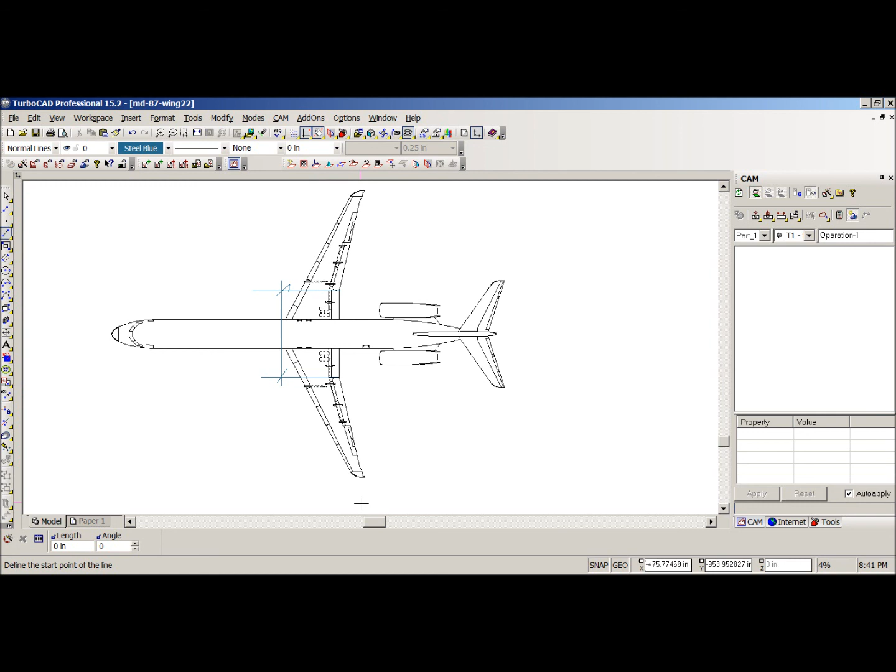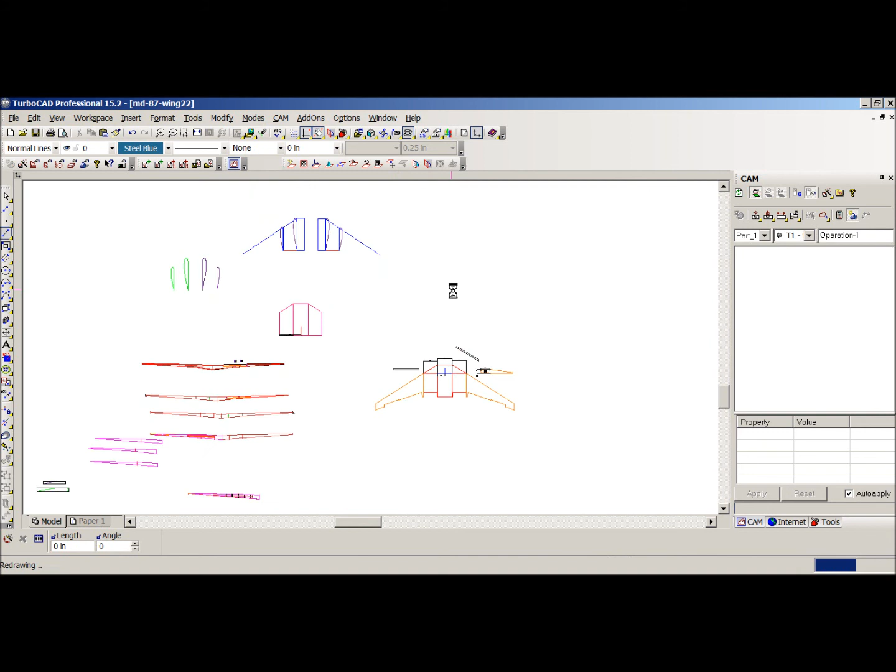So let me just back up and give you an idea. As you can see, there has been a lot of work going on with the wing. Various issues, things I had to figure out how to solve. With a lot of patience and a lot of effort and time, I was able to do that. And if I back on out of here, I'm just giving you an overview of where we're at. You can see here, this was actually the final design. I have a left wing panel, a right wing panel, and then a center panel.

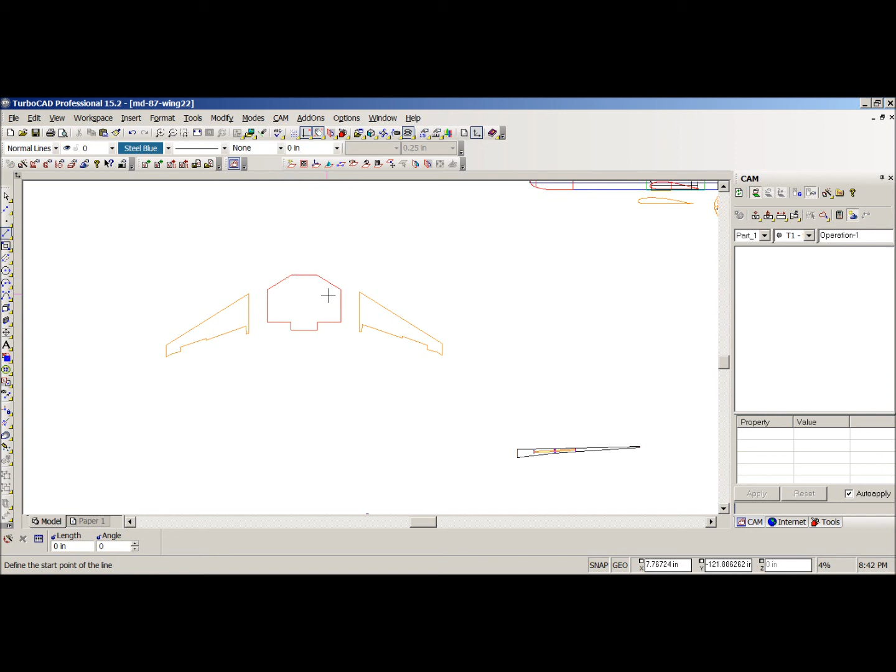So this is the final, where the center panel is going to be made up of 3 different panels. You're going to have the 2 outer panels, which are here and here. They're tapered in the opposite direction, so they'll have to be cut independently. So basically the wing is going to be cut in 5 sections: a left outer panel, a left inner panel, a center section, a right inner panel, and a right outer panel. With that, let's go on and take a look at my templates.

You can see here, this is the way this thing was coming together. We have a template for the tip. We have a template for the center seam here, where the outer and inner panels will join and split. And then I have a center section here, which will be a constant chord of about 10.5 to 11 inches. That'll be a straight section, but the other 2 sections will be tapered, so they require ribs.

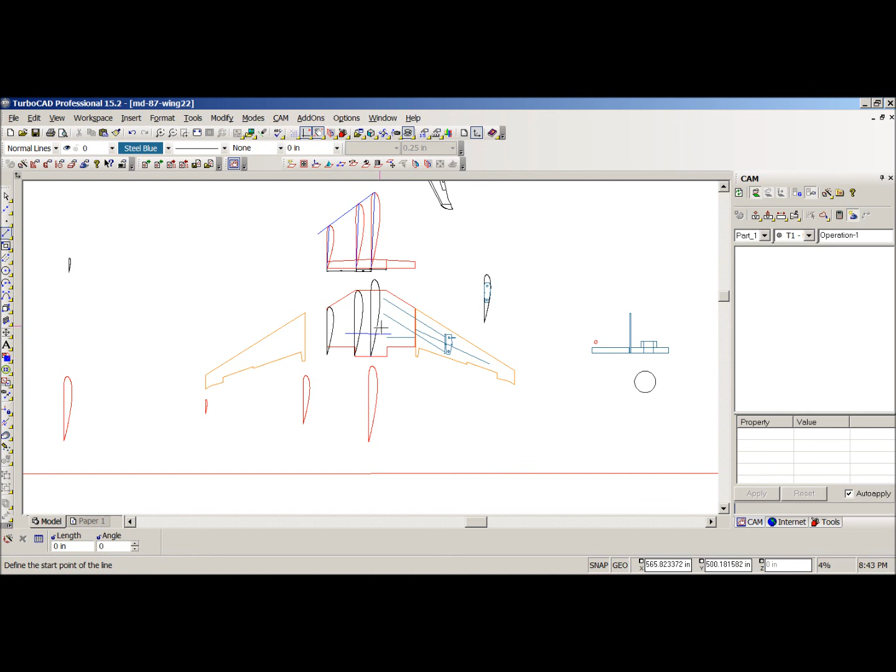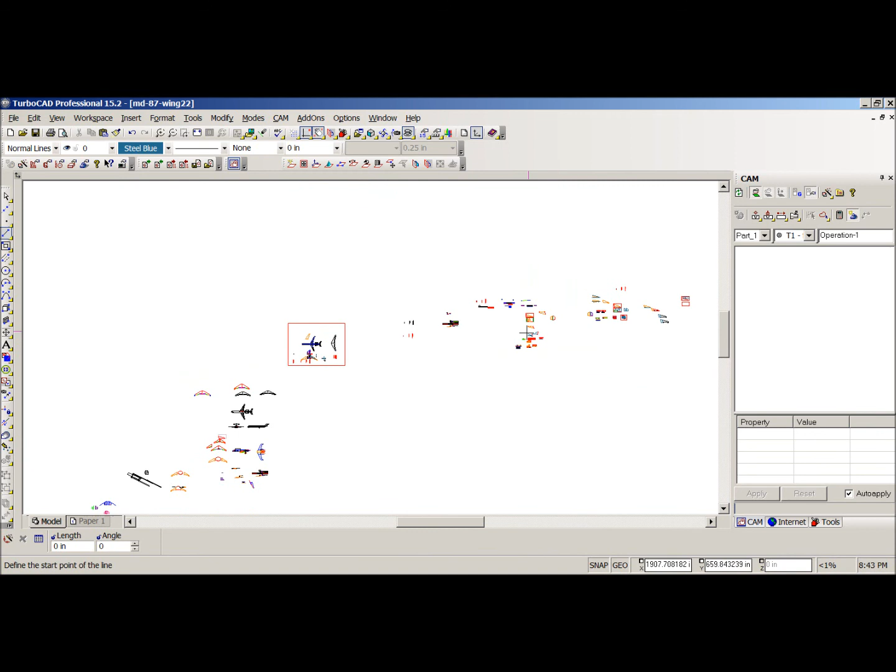This rib will work here as well as in this location. This rib will work here as well as in this location, and then of course these 2 ribs here we'll be using today in this update to cut the outer panels left and right. I have a technique that I use to cut wings, and you'll see that it not only works really well, but it ensures that your wings are exactly the same.

So with that said, let me go ahead and get into the workshop. And by the way, Tom is helping me do this, and Tom has never cut any wings before, so this was an experience for him, and he knows I appreciate his help with this project, as he's been a great help. So have a few other people. Also, I'd like to mention, the feather cut unit that I'm using was given to me by a good friend at the flying field, Jack. I told him that I would be using it for this project.

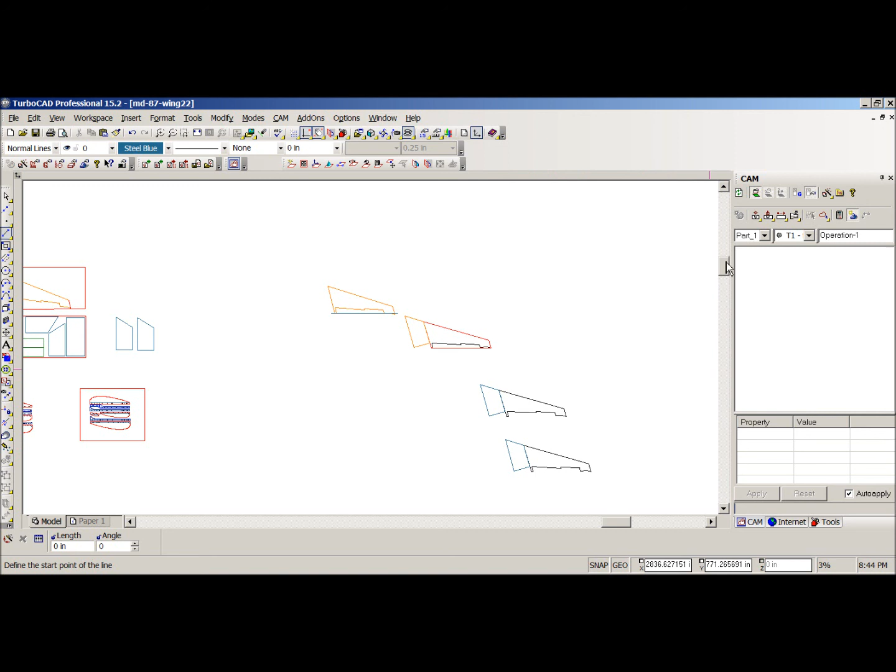So here's a look at the feather cut system in action. First, I drew up the airfoil that I wanted to use, and then I had to make some templates, and I use Formica for the templates. The Formica will last a pretty good while, it's pretty easy to work with, and the wire doesn't seem to attack it like it would some other softer woods. When it comes to making the templates, a couple things you want to remember. Number one, if you're making a constant chord wing, in other words, both sides are the same size, then you can simply make 2 templates and they will be exactly what you need on both sides.

If you're making a tapered wing, you need a template with a taper. Then on the side that's the smaller size, you want to make that a little bit thicker than the finished core that you want, for the simple fact that whenever you're using a bow, a hot wire, to cut the foam, the wire never really touches the foam if everything is set properly and you're cutting the foam the way it should be cut.

So what happens is the wire gets hot and it melts the foam ahead of the wire. And for that reason, the longer the wire sits still, the more heat is going to be trapped and the more removal of foam, or the more kerf you're going to have. So because of the distance here and the amount of taper, I know that I need to add a little bit more to the overall thickness of this tip than I would here.

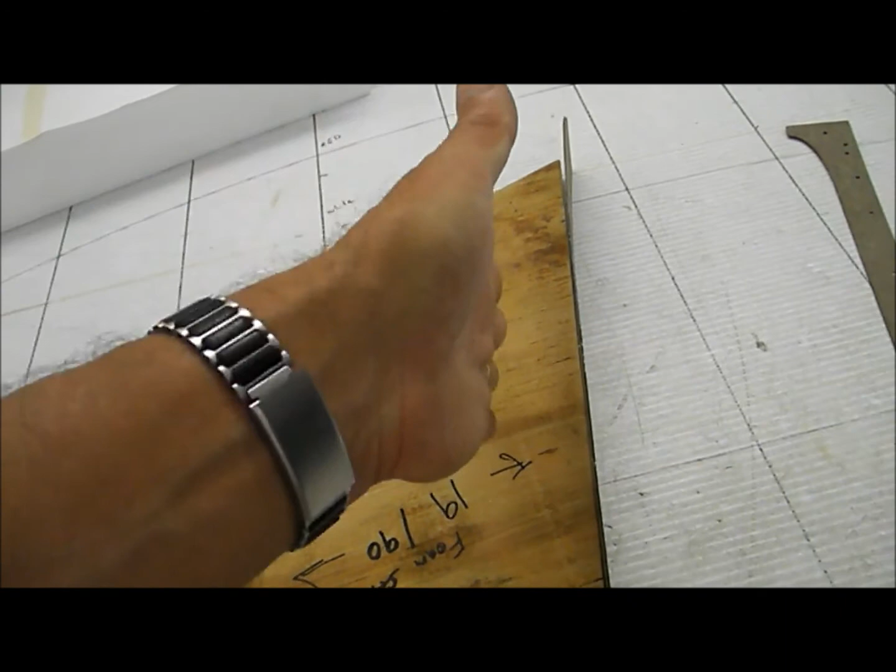Now I could set my foam core in here, line my foam up on the front, it will be lined up on the back, shift it all the way to the center, because that's the most important dimension. The tip dimension won't matter, but I'm going to be joining this, so this has to be flush. Whenever I cut the other one, I'm going to do exactly the same thing. I'm going to move it up here flush. But at any rate, now all I've got to do is load a blank in here, and then I can cut it. Take my blank out, and I can put the other blank in.

But one important thing I have to do, I have to take this template off, flip my base over, remount my template. Now, one other thing about this template that you should pay close attention to: notice now if I turn the template this way, my holes still line up so that I can screw this template in place. Now I'm cutting the opposite side. This would be cutting the right side, and then this would be cutting the left side.

Notice my trailing edge is here and the leading edge up there. So this would cut the top, then I could take that one off, screw this one on, and that would cut the bottom. And again, to cut the other side, flip it over. Now this is the trailing edge, so you'd wind up turning this around. You'll see that in the video, but still we mount the templates the same way.

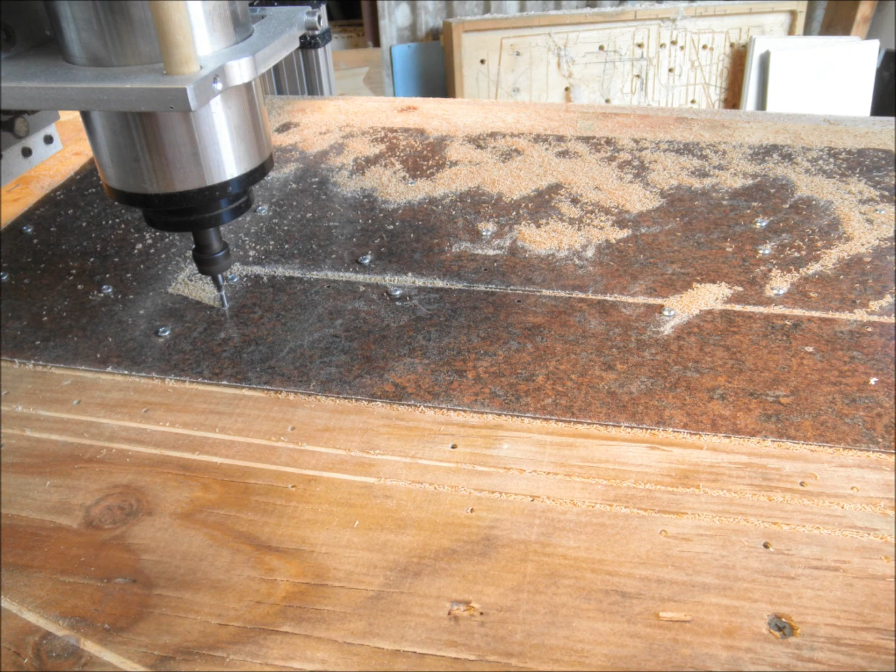Now I'm going to show you how we went about cutting these cores. So this is our airfoil. This is the top. This would be the bottom. And line up all the holes. And it presents us with the top and the bottom of the airfoil.

This would be the tip. Again, line up the holes. We wind up with the top and the bottom of the airfoil. Again, line up the holes. We wind up with the top and the bottom. This is the point where the outer portion of the wing will plug into the root. Right. This is the tip. This is the inboard. And this is right next to the fuselage.

This would be the center section with the fuselage between it. So it's going to be straight here, and then it'll start to taper after it comes out of the fuselage. So these will be attached to a board, and then the foam will sit between it. Yep. And then the wire will cut the cores. The wire will start here up against the foam. The foam actually starts here, and the wire is pulled across, ending at the trailing edge.

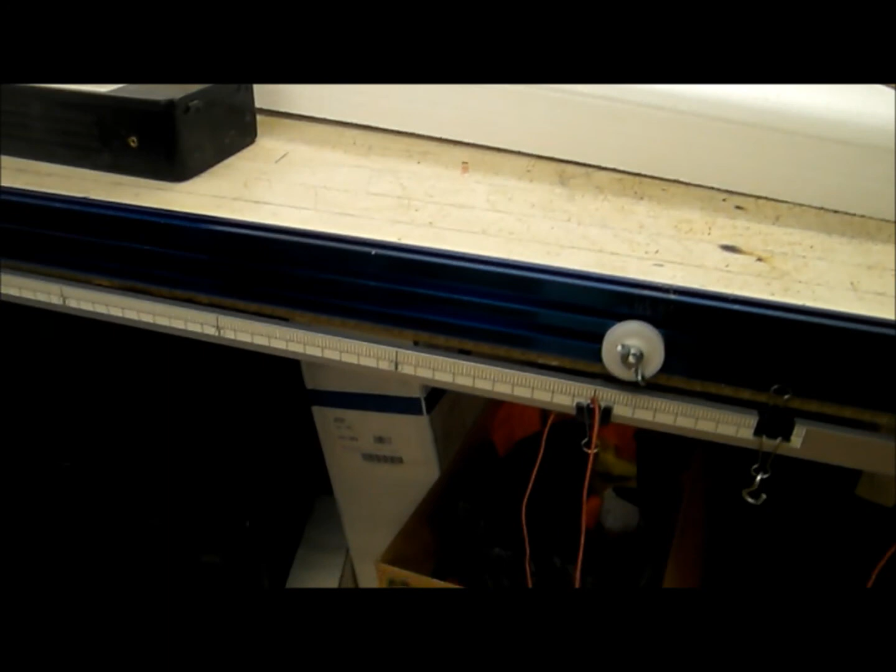Why is your side moving quicker? Because the weight's over there? That's a good question. I'll explain this. Okay, the way this system works is we have a bar here. Let me take the weight off of it. This weight right here dictates how fast it moves. Right. But we have a bar here. Okay, and now if you'll hold that bar right there for just a moment. Now we'll let go of the bar here. Okay, so now the bar's hanging. Notice we got a line attached to this point, and then we got a line attached over here.

This line here, because the distance from here to here is less than the distance from here to here, this line here travels more as this bar moves down. So because of the taper being what it is, there's really no way to have them come out the same. The bar, as it moves down, is moving this line faster than it's moving that one. Right.

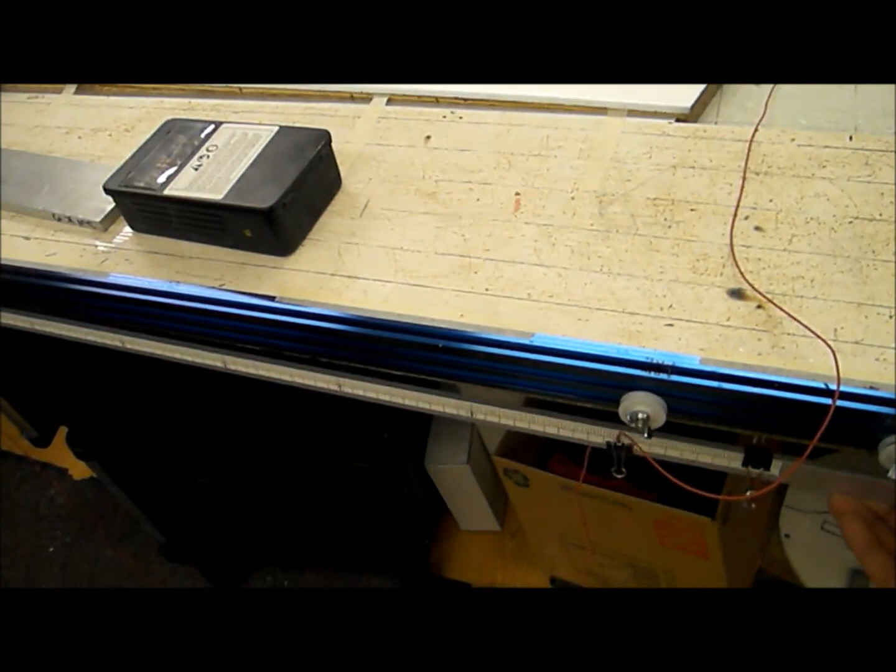And so the way you set this up is you calculate, you pick a point. Here I've picked the point of 90, and then the other point you just keep adjusting until you get the travel so that it starts at the point up here, and when you get to this point here, this one over here is at that point as well. This one needs some adjusting. So this one you do the adjusting. You got to leave one of them. You could even do it the other way, where you leave that one and adjust this one. But generally it's easier to adjust the small one.

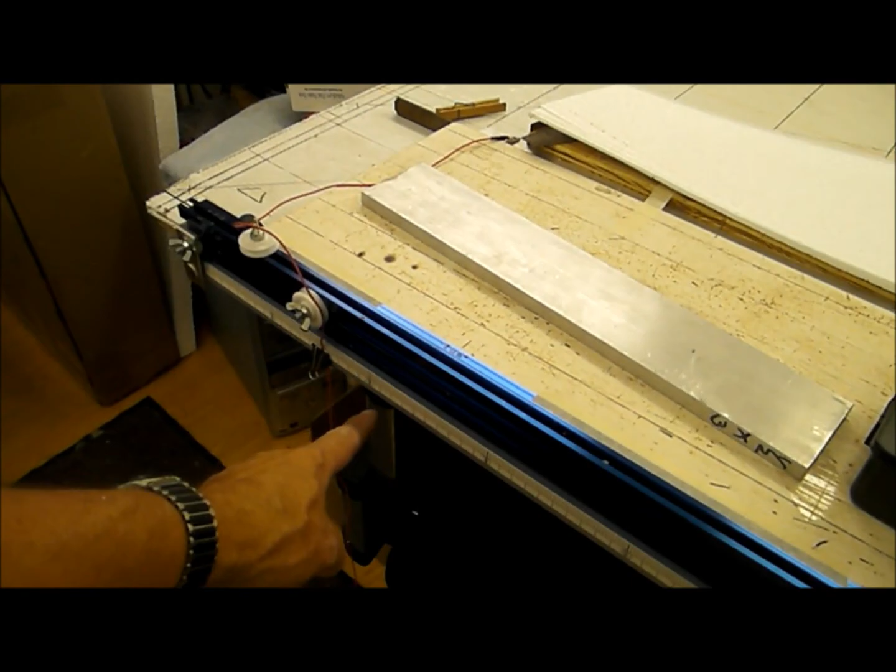So which way would this have to go to speed it up? Out here. It goes out, yeah, right? That way. If it's not moving far enough, then you would move it out. If it's moving too far, then you can move it in. All right, here we go.

We're about halfway there. Yep, about halfway here. Let me know when you get about an inch from the end. Okay. It's about an inch now. Don't worry. I'm at the end. About a ½ inch. Oh, okay. Okay. Hold the wire. Hold this. Okay, I got it.